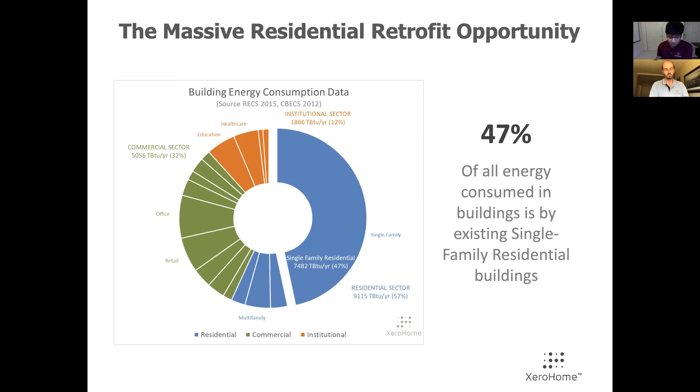And the one big thing that comes out at you is single family residential buildings consume about 47% of all energy consumed by buildings. This is existing buildings, and if we're serious about our goals for greenhouse gas emission reductions, we have to be targeting single family residential buildings and existing buildings in general. So existing buildings are key to decarbonization.

Studies have shown that about 25% of greenhouse gas emissions are attributable to buildings in California, and this should be true for other states as well. And almost 90% of homes use gas for heating their space and heating water. So these 90% of homes that are using gas equipment are great candidates for switching fuels from gas to electricity, which is a much cleaner fuel and in future gets even cleaner.

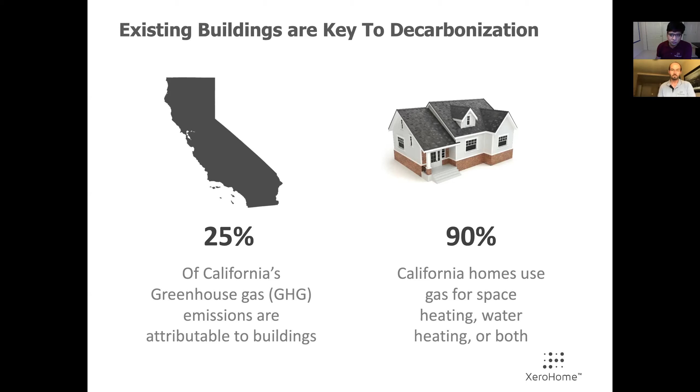So that's really the target, and to be able to get to those is going to be the most important goal going forward. So if you want to really reach these homes, the question that we need to ask ourselves is: is electrification cost effective for these homeowners that we want to go and change their heating systems and water heating systems with?

So if you look at a home, they typically pay utilities for gas and electricity. So if you have a home that has gas equipment and you're replacing that with an electric unit, the question then becomes, are the bills going to be lower, and will they be able to pay for the capital cost of this new equipment? So the question really is, can that be done?

And when you look at the math, it really gets very interesting, because heat pumps are about 2 to 4 times more efficient than gas units, but they use electricity, and you're displacing gas, and gas as a fuel to deliver energy to a home is cheaper than electricity. And if you look at data from DOE, which is this graph on the right, which plots the ratio of electricity to natural gas prices, electricity is about 2 to 6 times more expensive.

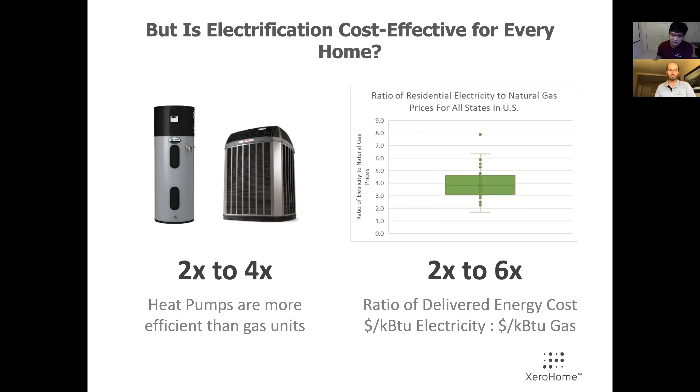So it's very interesting, because you have a 2 to 4 times more efficient unit, but it's using a 2 to 6 times more expensive fuel. So will it work out, and what are the factors that determine if the cost effectiveness stands or not? We've been doing some work on this. We've realized that electrification cost effectiveness depends on several factors. A big one is what we just talked about, which is this disparity between electricity and gas prices.

But it also depends upon the home itself. The age and the efficiency of the existing unit that you're replacing play into that cost effectiveness. The existing envelope of that building matters. The weather and the location where that building is plays a huge role in determining how much that equipment is going to be used and whether it will be cost effective over its lifetime. Other factors that are listed here also play important roles.

So really what we're trying to make the point here is that the answer can be different from one home to another. And really there's no one size fits all solution. So that's unfortunately the answer. So when you're faced with this, one way to think about it is, how do you solve this problem and how do you do it at scale?

One way to do that is with energy assessments. They're a great, detailed, and very accurate way of doing this, but they're not scalable. They cost a lot of money. You have to send someone to physically be at a home to do the energy audit, and that's not going to scale very well for large populations. So the way we think about this is that the key to crack this is data and scale.

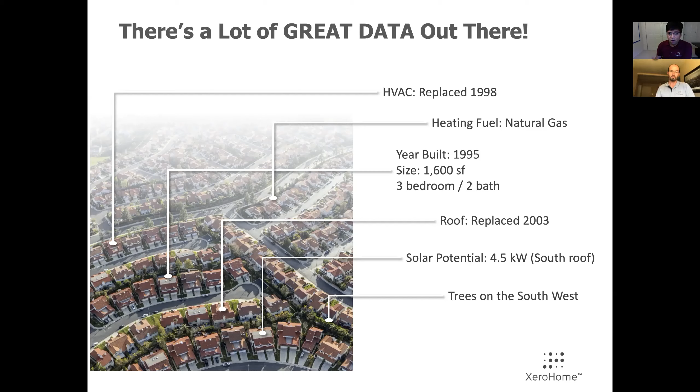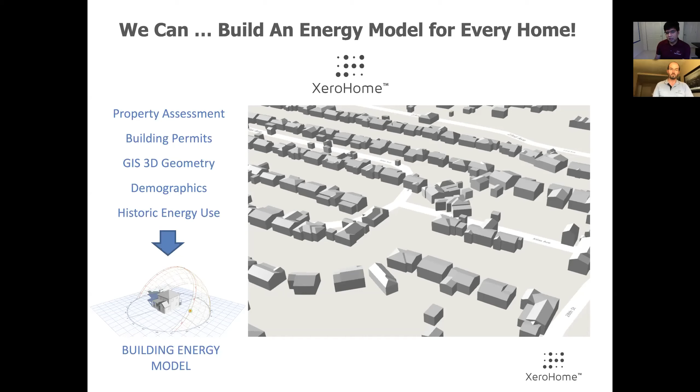So our thinking at XeroHome is that we can take all that data and put it together to build an energy model for every single home. So you can take property assessment, building permits, 3D geometry, and even demographics data. And if a homeowner allows us to use energy use data to build energy models, which can even be calibrated energy models, then with that energy model, we can provide some great analysis that can determine if certain measures are cost effective or not.

So XeroHome is a web-based tool that we have developed. It has an output, which is also a web-based output. It kind of looks like this. A homeowner can type in a home address and they are given recommendations about what works for their home. They're given a very simple to read diagram, which is colorful and easy to understand.

Each segment of this colored diagram from left to right is an energy efficiency measure. If it's cost effective, it's recommended first, so it's towards the left. If it's not cost effective, it gets recommended towards the end or towards the right. And together they make up a plan or a path to get to a goal of net zero energy or net zero carbon for that home.

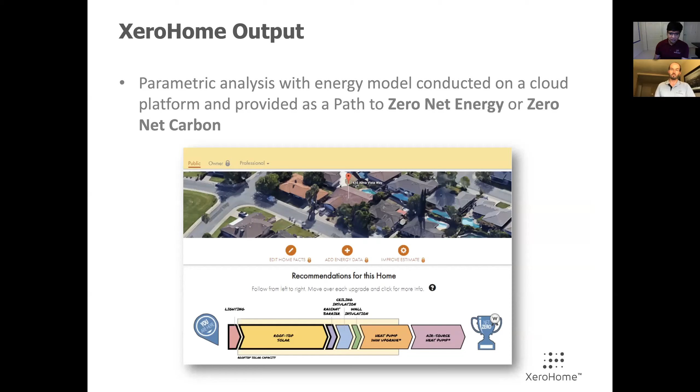So once you get a homeowner and once you present them this information, you can also start sort of a collaborative process with them in which you can ask them some questions and you can say, hey, fill out a questionnaire for us, give us some more information. And the reward for that is that as soon as you give us more information, you get a better recommendation right away. So it's very interactive.

And to encourage the homeowner, we give them some badges like white, green, and blue, which allows them to continually give us more information with site observations from their own home. So that becomes sort of the model that we work with, and we allow homeowners to give us more and more data. So at the end of the day, this process that we've built with XeroHome is extremely scalable because it's mostly automated. If we can do this in one home, we can do it for thousands of homes together for an entire city or an entire region.

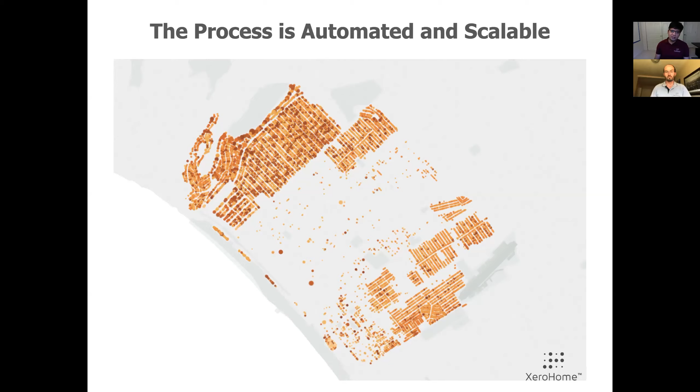And what Peter's going to talk about in the next few slides is our project with Southern California Edison. We did a project for the city of Santa Monica, supported by Southern California Edison's ET, or Emerging Technologies project. And in this, we applied the XeroHome tool and methodology to really solve this problem of trying to find out how we can scale electrification in this city. So, Peter? Great, thanks, Mudit.

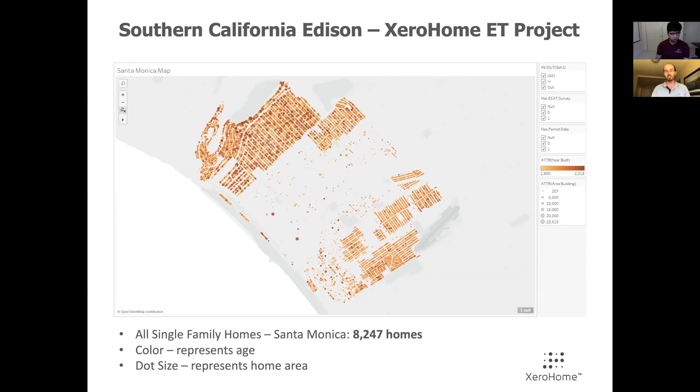Yeah, so if we could take a look at the next slide, we've got a now familiar map of the city of Santa Monica. Santa Monica, as you know, Southern California, wonderful sunny climate. Lots of single family homes there, about 8,200 for us to work with. The map shows you the diversity of ages represented in color and of sizes of these homes, which are basically the size of the dot. We've got everything from smaller, sort of turn of the century bungalow type places all the way up to brand new mansions effectively built along the golf course. So a pretty diverse building stock to work with.

What we're presenting to you today is phase one analysis of the city that we did. This is prior to actually releasing the tool to homeowners. So we haven't yet received homeowner input. This is just what we've been able to do with the rich public data sets that we have access to. And to give you a sense of some of the results, I'll just show you a couple different individual homes just to give a flavor.

So here again is the path to zero diagram that Mudit was showing you earlier. And these are results for a home from 1926, about 1,700 square feet. It uses gas for its heating, and it had a new roof put on in 2017, but otherwise we haven't detected a whole ton of recent updates to that building. And so as you can expect, there's a lot that can be improved there, is what we would suspect.

So everything from lighting to ceiling insulation, even some wall insulation improvements, and so on. Now, a couple of things to note. What you will notice happening, and this is the electrification dynamic that we spoke about earlier, is that toward the left-hand side of the diagram, you have the most cost-effective things. And lighting, not surprisingly, is one of the first things you should be doing.

Most people would know, but then interestingly, solar shows up even before a lot of energy efficiency measures, and people might scratch their heads, but in Santa Monica, with the TOU rate structure in place and the gas pricing in Santa Monica, this really makes a lot of sense. We have relatively high TOU rates, and anything you can do to shave your electricity, especially on peak, is going to make a lot of sense. So rooftop solar is a very cost-effective measure there.

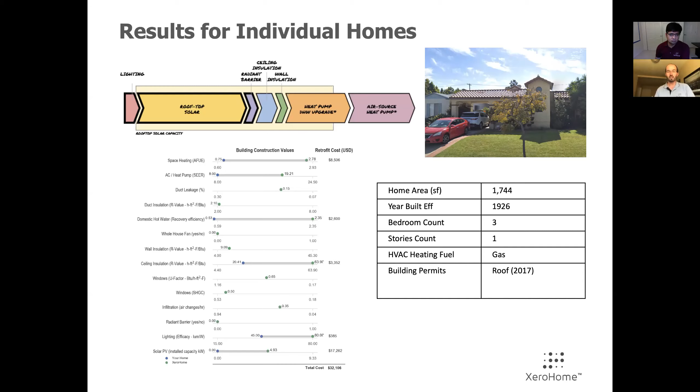The electrification measures, somewhat to the contrary, fall to the far right-hand side of the diagram, meaning they're the least cost-effective, but they're also essential to getting all the way to zero and fully decarbonizing this home as well. So heat pump water heater and air source heat pump both factor into that plan.

Now, if you look at the next home, this is somewhat intuitively a little bit sparser, because this is a home built in 2013, a lot newer construction, and not a whole lot of opportunity for many of the energy efficiency upgrades. However, there is still a big decarbonization benefit from electrifying, and you can still see those showing up. If you still want to get this home all the way to zero, you're going to have to do those electrification measures. But again, not very cost effective, especially when compared to options like solar.

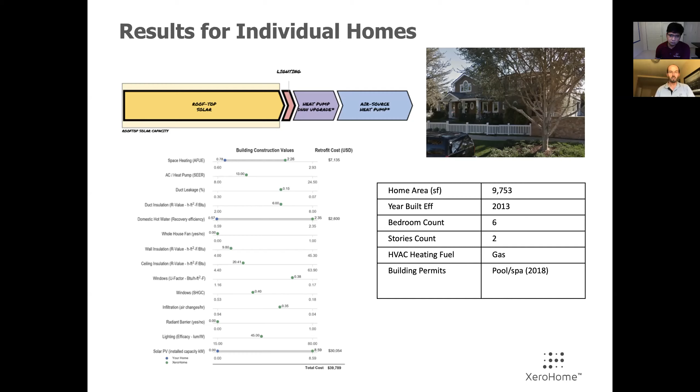So we saw this pattern coming up again and again as we surveyed across our initial cohort of about 1,000 homes. We're going to be going to all 8,000. But what we see is electrification measures didn't produce positive net present value, didn't actually produce cost-effective savings on their own in this particular climate and in this particular economic environment. And it's the rates. It's definitely the disparity between electric and gas rates. It is also the climate.

It is the mild climate, and there's very low heating and cooling loads in Santa Monica, and so heat pump HVAC isn't netting you as much savings as you might get in some other regions. Rooftop solar, on the other hand, super cost effective for reasons we described, and it's beautiful, sunny Southern California, so not too surprising.

Interestingly, there's almost not a single home in this set that could get all the way to zero or to deep decarbonization without these heat pump upgrades, despite the cost effectiveness. So they keep showing up as recommendations. They're just kind of, save these for later. So we keep thinking, well, what can we do to make more of that happen now? We need that rapid transformation to start happening.

So we started looking into the concept of bundling, and looking at the economics of electrification and solar when they're considered as a bundled installation. So we took this approach. Here's an example for a home from 1948, very similar to some of the ones you've seen so far. It has a recommended rooftop solar installation of about 3.7 kW based on our analysis of its roof and its exposures. So here we're going to start with the base case for that home.

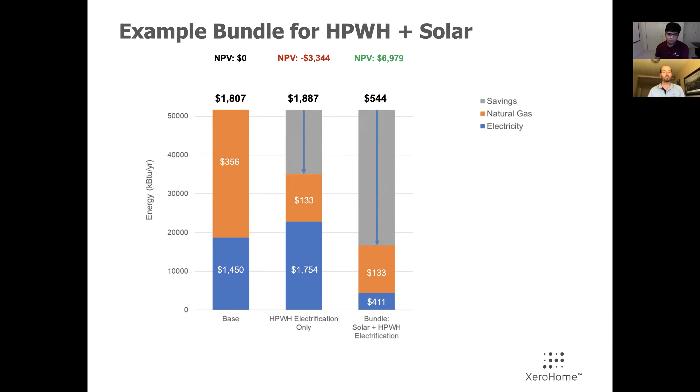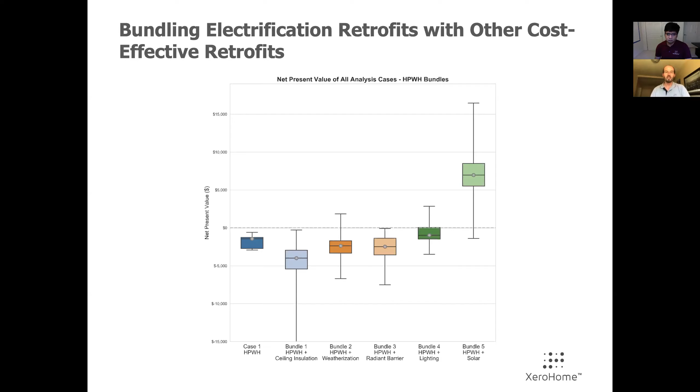What you can see is that for most efficiency measures, the homes that come out positive in terms of the economics and positive net present value are really the exception to the rule. Whereas with solar, by far they're in the majority, and the vast majority of homes are going to come out with a very healthy net present value. But there are still a few that don't make it.

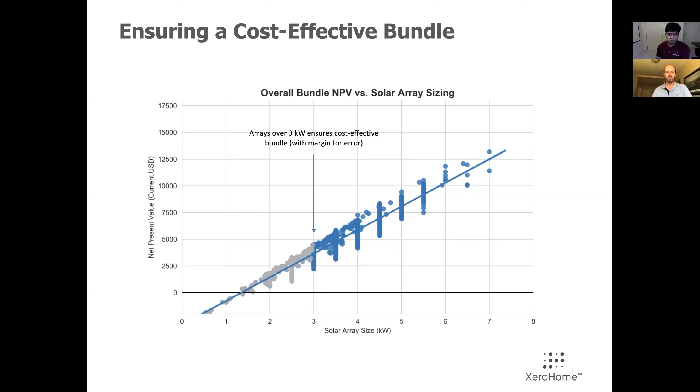And what we found is it's strictly a function of the array size that your home is expected to accommodate. This chart shows roughly your net present value of the bundle versus the size of the array that you install. And as you get down to homes that can't accommodate very much solar, about 1.5 kW or less, you start getting very negative net present value. So we found that for a safe margin, for homes about 3 kW and above, which by the way would be most of the homes we would analyze in Santa Monica, this is a very safe and cost-effective measure to be installing.

So overall, this started to get us thinking about what we could do with this to actually encourage this sort of bundling. Solar plus electrification bundling could be the next frontier, next consideration in REACH codes. This could be a requirement that's triggered at the time of permitting for solar installations. So you pull a permit for solar, and depending on some other criteria related to your home, for example, how old your existing water heater is, you might be required to retire that equipment early and install a heat pump water heater. That could be what a bundle looks like.

And what this would do is, of course, greatly accelerate the pace of electrification retrofits in the residential sector, which is something that we really have to do to keep up with climate goals, in that market transformation component. So this REACH code concept was presented to Santa Monica itself. Some of the city staff have taken a look at it, but it hasn't been formally endorsed or considered at the city council level or anything like that. So that's where we stand. But exciting possibilities with that.

So overall, the economics of electrification, as we've said, are highly dependent on the local conditions. To get it right, you really need to look at everything from the utility rates, the individual home equipment efficiencies, the climate, available rebates, et cetera, to get a full picture of this. This bundling approach has really identified a way to combine electrification with other more cost-effective measures, in areas where electrification on its own would be challenging, and to put together a package that actually works economically for everyone.